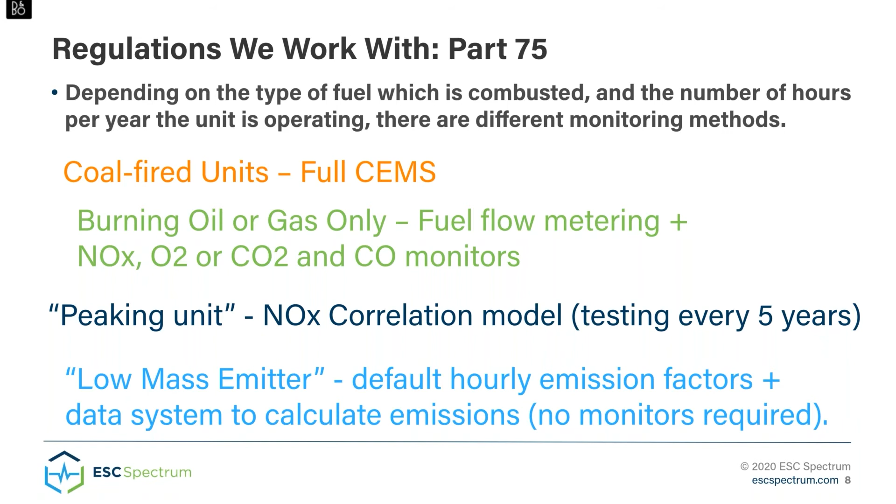So now you can see by these four examples that the amount of monitoring that's required, the amount of investment that's required, the amount of work that's required varies with the type of fuel that you burn and the number of operating hours that unit operates during each calendar quarter.

Moving on, how are these three regulations similar? Well, all three of them are similar because they all have a foundation in what we call 1-hour averages. For each minute that the unit is in service, the monitoring system measures the emissions that are desired and develops a minute average. Those minute averages are used to create a 15-minute average, and each of the 15-minute averages recorded in an hour are used to come up with an hourly average.

The same methodology for developing these hour averages is used both by Part 60, 63, and 75. Each of these regulations requires that these CEM systems be certified, and there are procedures outlined in each of the regulations on how to certify them.

Each regulation also requires that there are daily quality assurance checks. These checks are typically done each day to make sure that the accuracy and reliability of the monitors is being utilized, and that they are operating repeatedly and accurately each and every day. Each regulation also requires that some sort of quarterly or periodic reports be submitted to the agencies.

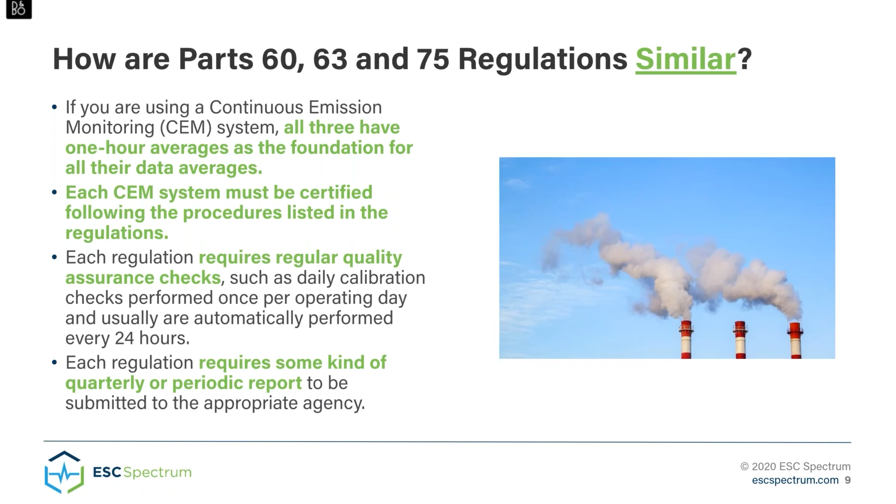Moving on, there's also annual requirements, meaning that every 12 months or so, you have to perform what's called a relative accuracy test audit. A relative accuracy test audit is a comparison between the emissions recorded by your monitoring system versus another monitoring system brought in by a stack testing company.

Stack testing companies are brought in from the outside. They use special reference method equipment that is approved by the US EPA, and you do a side-by-side comparison of the performance and measurement levels of your system versus the stack testing system.

This relative accuracy test is a series of comparisons and lasts between 3 and 8 hours in duration, and hopefully it proves that the accuracy of your system is very close to the stack testing or reference system.

In addition, we also have other events that we're concerned about. Like, for example, if excess emissions are recorded, meaning your hourly values or multiple values are recorded above the emission standards or emission limits outlined by the regulation or your permit - that's not good.

Excess emission periods mean that you are emitting more pollution than you should be, and something's wrong. Another occurrence is called downtime. Downtime occurs when the unit is in service and operating and making emissions, but your monitoring system is not working correctly and recording what the emissions are. The regulations basically say every minute that the system is in service and creating emissions, you must be monitoring those emissions accurately. When you're not, that period of time is called downtime.

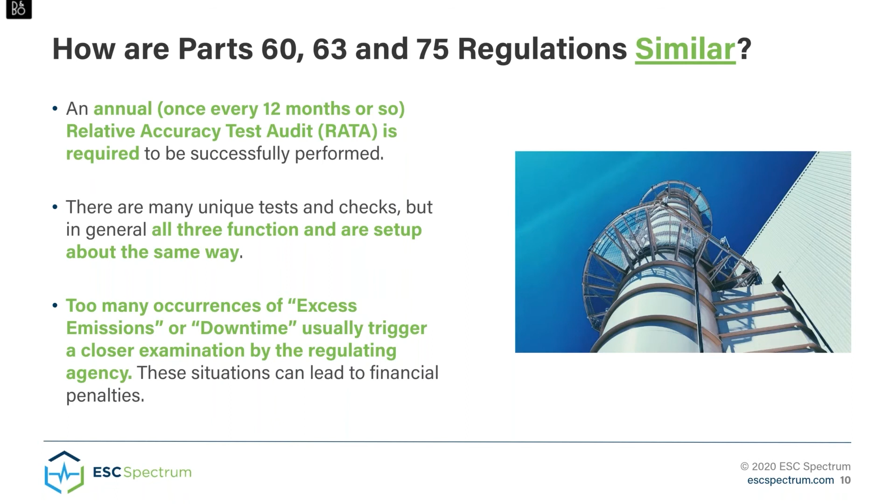All three regulations have emission limits or standards that they impose, and they can also have mass limits, meaning pounds per hour, tons per day, or other mass standards. The duration of these standards can be short or long. For example, some limits are as short as 6 minutes, while some averages are as long as a whole year. It depends upon the nature of the pollutant and the type of device you're monitoring that determines the duration of these standards.

If data shows that the emissions are over the limit, it's called an exceedance, and your facility can actually be fined or forced to be shut down if you consistently have these exceedances.

The regulations also define how compliance is determined. Compliance means you are demonstrating that your facility is operating in a way that does not exceed the standards. Continuous emission monitoring systems are typically used to demonstrate that you are in compliance with these emission standards. These emission standards are also defined in the operating permits.

Each facility in the last 25 years has been required by federal law to obtain an operating permit. The operating permit is the legal right for that facility to operate. Without an operating permit, the facility is not allowed to operate. You'd be surprised to know the number of types of facilities that are required to have operating permits.

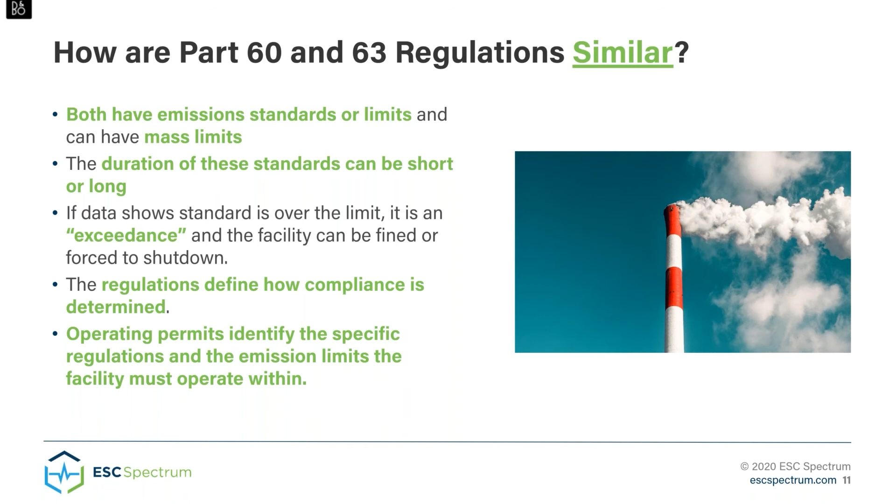The regulations and permits require that you demonstrate compliance with the emission requirements of your permits. There are three different types of compliance we'll talk about briefly. First is continuous compliance, where data is recorded continuously, taken from monitors and sent to a data acquisition system where it is continuously recorded.

The second type of compliance is periodic compliance, where data is recorded or written down on a periodic basis. You might be required on your permit to do a walk around of your facility to make sure everything is working correctly, perhaps once a week. This once-a-week check is an example of periodic compliance.

There is also indirect compliance, used because sometimes there is no direct way to measure a particular pollutant of concern. If that pollutant is being controlled by a pollution control device, then the operating conditions of that device or process are typically monitored to demonstrate it is operating properly. You might be forced to record the temperature, pressure, pH, or water injection rate of a pollution control device to demonstrate indirectly that you are in compliance.

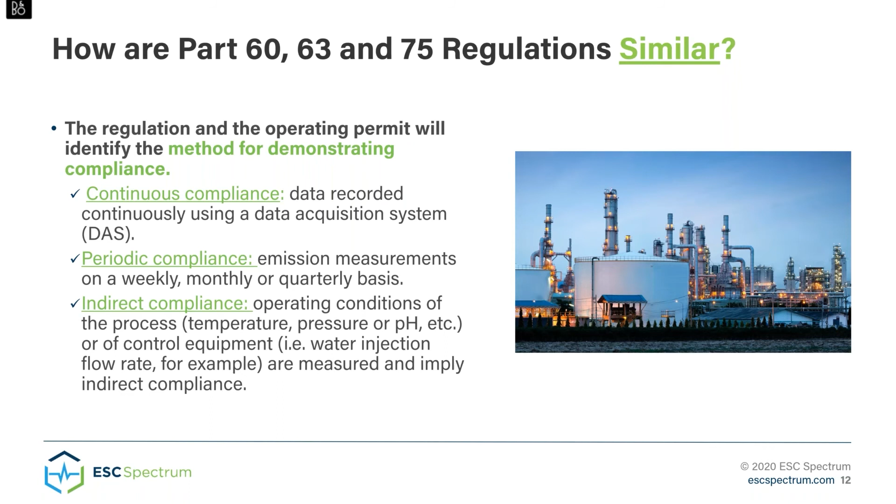How are these three regulations different? One way is that Part 75 addresses data downtime or data holes differently. Remember, downtime occurs when the monitoring system is not recording accurate data as it should be during all periods of time that the emission source is in service.

Part 75 handles these data gaps differently in that it goes back into your historical emissions database, and under similar operating conditions occurring now, it uses historical data to estimate and fill in that gap with what it believes is representative data. The algorithm that calculates this replacement value is tested and approved by the EPA. It's done on an hour-by-hour basis using an approved EPA algorithm and historical data. In that way, Part 75 differs from Part 60 and Part 63.

Those two systems report the downtime, where Part 75 fills it in with historical data.

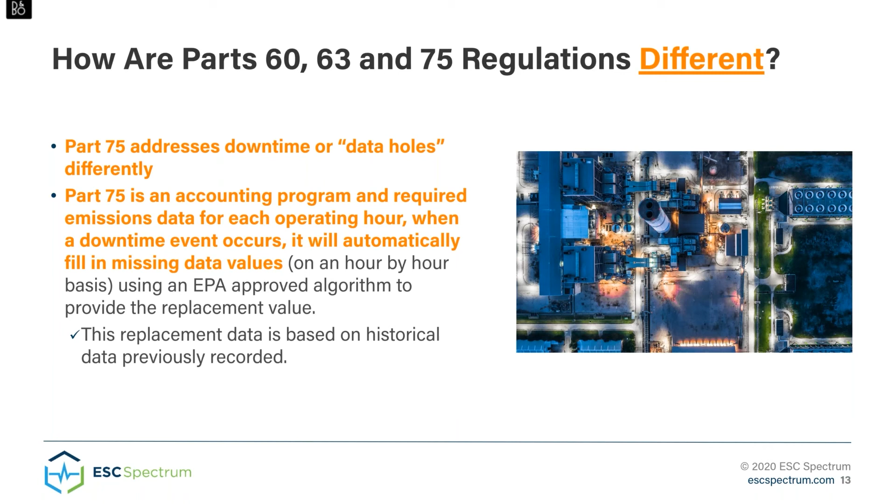Let's talk about operating permits again. I mentioned them a little bit earlier. Operating permits really came into effect starting in the late 1990s, initiated by the Clean Air Act amendments of 1990. The purpose of the operating permit is to have one document covering all the air regulations on that facility. It contains everything an operator needs to know about the requirements for operating that facility, what they can do, what they can't do, and what response the air quality agencies expect from them. So it's a single document that incorporates all the air quality regulations and information into one place.

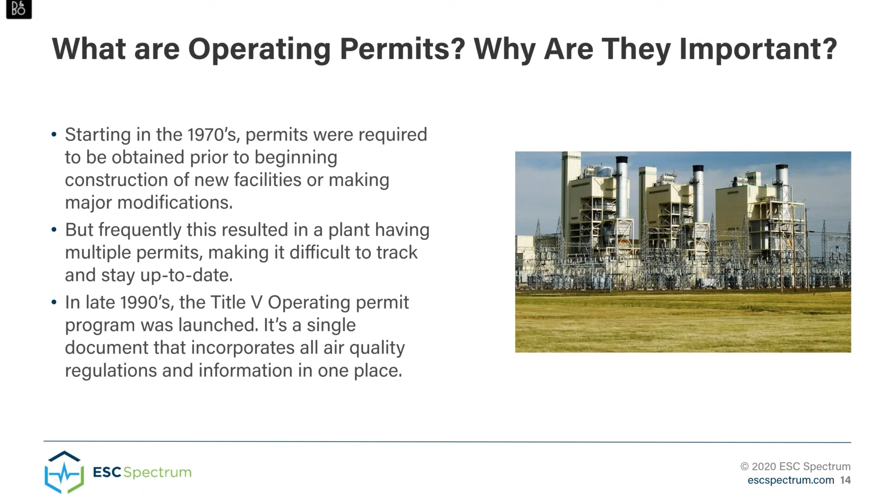Let's move on to our second topic, which is boilers and combustion turbines. This is where you burn a fuel and the fuel releases heat. That heat is typically used to create steam, which is used in a process to operate equipment, whether to run some pumps or spin a turbine generator to make electricity. Boilers and combustion turbines take the fuel, burn it, release the energy, and create a product.

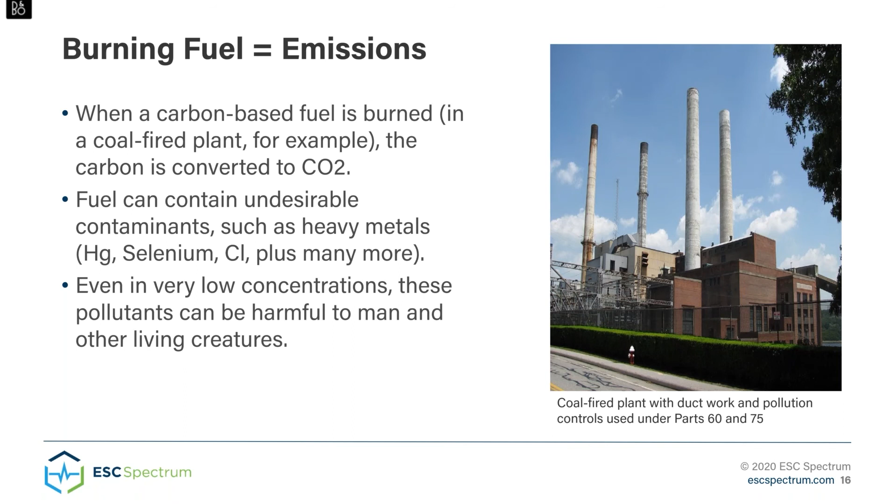Let's talk a little bit about the pollution control equipment. Lots of plants add pollution control equipment to reduce or capture their emissions, trying to bring emissions below the limits found in their permits. There are four main pollutants that the Part 60 regulations focus on. The first is particulate, or as you typically think of it, smoke. Those particulates inhibit the ability to see through the flue gas stream, so we call that smoke. There are specific pollution control devices built and used to capture those particulates.

First are cyclone separators. Second are baghouses, which are no different than the vacuum cleaners you use in your home to vacuum the dust and particulates from your carpets. The baghouses that power plants use are much, much bigger, with tens of thousands of bags in them to capture that particulate.

Two other devices used to capture particulates are the electrostatic precipitator, which uses a static charge to attract and capture particulates, and the wet scrubber. We'll show you a picture coming up where you'll see what looks like a white plume coming out of a stack. You might think that's white smoke, but it really isn't -- it's the water vapor that the wet scrubber uses to capture the particulates.

The other two pollutants that Part 60 is concerned about are NOx and CO, carbon monoxide. Here we have chemical reactors that convert the NOx to oxygen and nitrogen gas, and further oxidize the carbon monoxide into carbon dioxide. These two types of reactors are catalytic reactors and selective catalytic reactors, which are very specific to the type of pollutant you're working against.

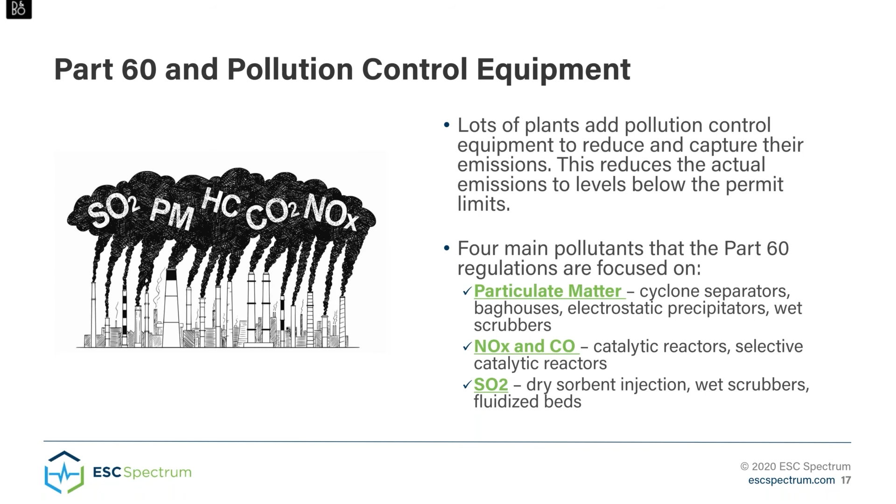Then you can also have what are called fluidized beds. Again, it's a chemical reaction system to capture the SO2. So these are the four main pollutants that Part 60 regulations are focused on.

Moving on, let's talk about the sources of those emissions. Let's talk about boilers and combustion turbines and how they work. Boilers are used to burn a fuel, like I said before - that can be coal, gas, oil, wood, tires, lots of different sources of fuel. It releases its thermal energy, heat, to boil water and make steam. This is a graphic representing a boiler where water is heated and converted into steam. The steam is directed to a turbine, causing it to spin. That turbine is connected to a generator, and that spinning generator and turbine set allows electricity to be produced.

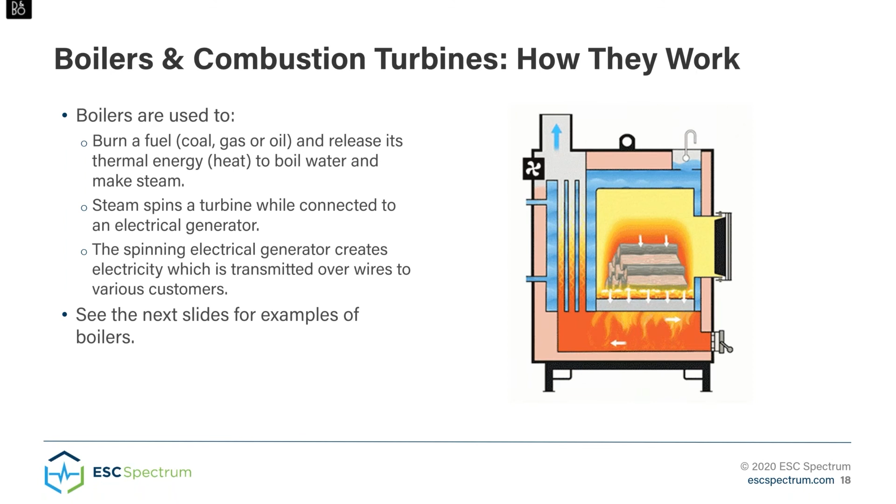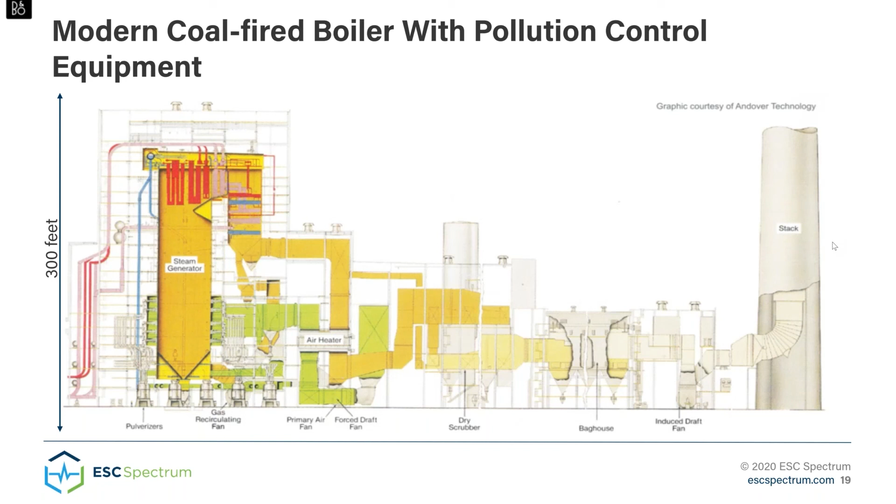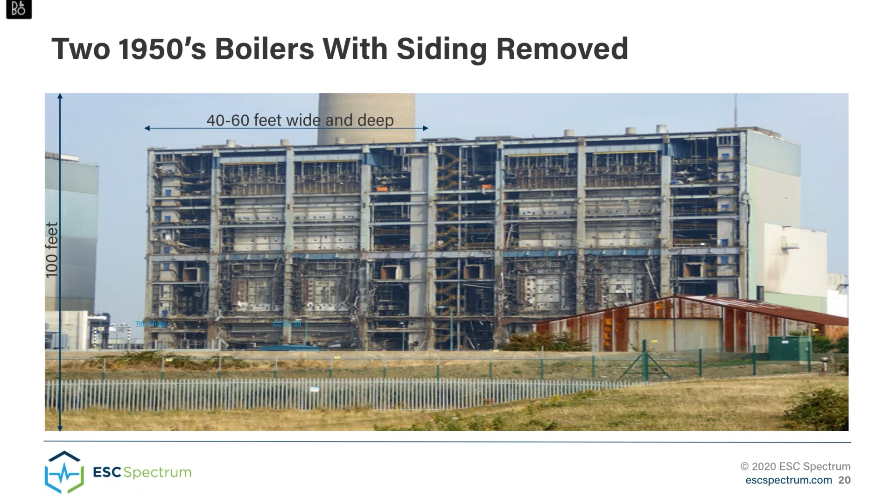Here's a picture of the side of a cutout of a boiler, and these actually are two boilers. These boilers were probably built in about the 1950s. They're about 40 to 60 feet wide and deep, and approximately 80 to 100 feet high. So these are two examples of mid-sized type boilers that were built probably in the 1950s.

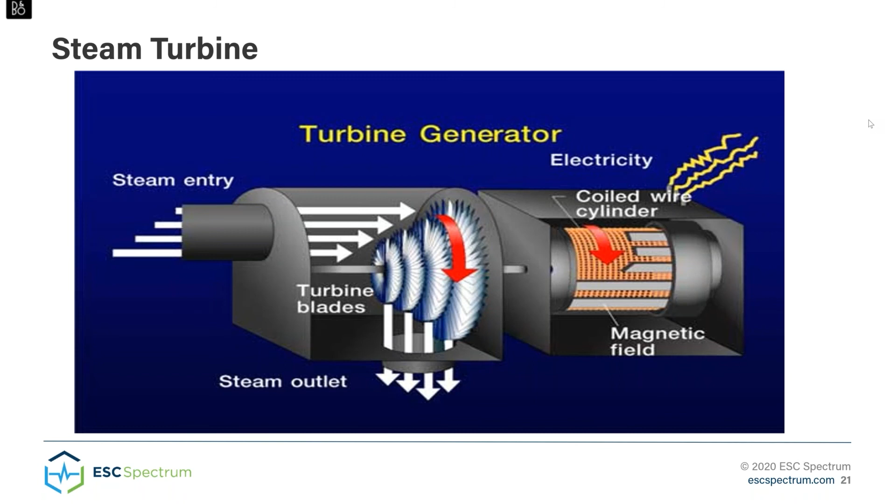Here's a simple diagram of a steam turbine. You can see that the steam is made, comes in on the left side and passes over the blades of the turbine, trying to spin the turbine, and then the steam goes out the outlet. As that turbine spins, it's on a shaft connected to the electric generator, and as that generator spins, it creates electricity. So this is how you take steam and make electricity - a very simple diagram of a turbine generator set.

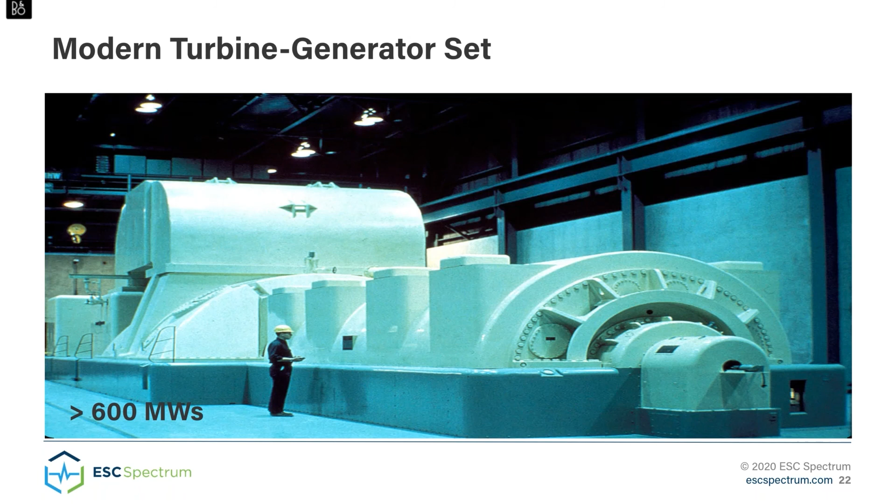Moving on, let's talk about a combustion turbine, or CT. A simple combustion turbine really is a jet engine from a plane mounted in a frame, and the exhaust gases are blown across the turbine generator set to spin it and make electricity. Gas or oil is burned as the fuel, and the exhaust causes the turbine to spin. After the exhaust gas passes through the turbine, the hot gases are vented into the atmosphere, where unfortunately a lot of the thermal energy is wasted. Nowadays we do it differently, and I'll explain that in a minute.

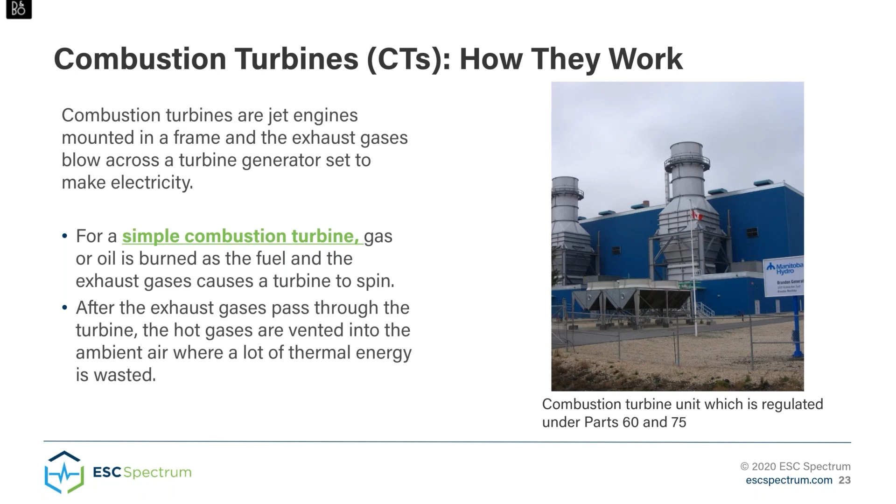To spin that turbine and out the exhaust stack. At the same time, that turbine is connected by a shaft to a compressor. So as the turbine spins, the compressor spins and draws in outside air and compresses it, so there's even more air and a hotter combustion chamber results. As those hot exhaust gases spin the turbine, that turbine is connected by a shaft to a generator, where electricity is made.

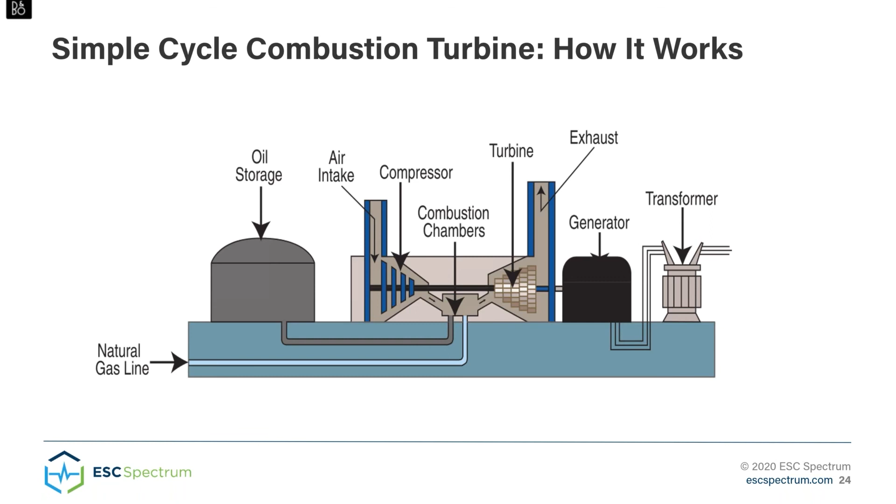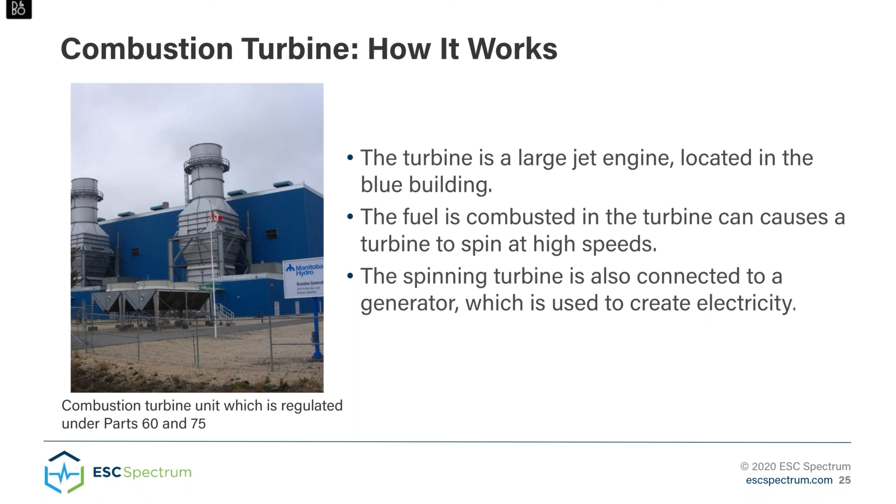This is a picture of a simple turbine generator. The actual jet engine is located inside the blue building. Again, the combusted fuel spins the turbine at very high speed, and it's connected to a generator where electricity is created.

It's not uncommon to see multiple combustion turbines located on a single site. A 4-pack like this is very common. The most I've ever seen at a single site is 64 combustion turbines at one site.

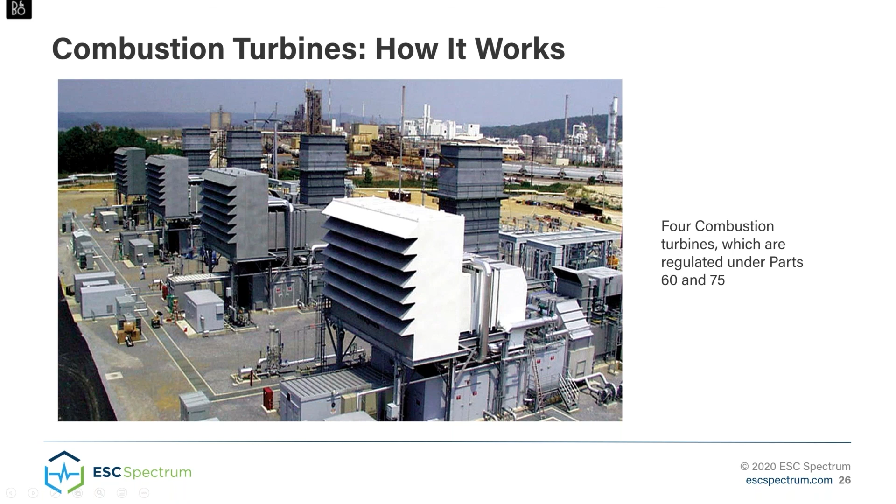Combined cycle combustion turbines are a little bit more complex than a simple cycle. As I said before, the hot gases pass through the first turbine generator set and are still quite hot, probably 800 to 900 to 1,000 degrees. They contain a lot of energy that normally is lost when vented off. But now it's routed through a heat exchanger, where water is heated up to make steam, and that steam is routed toward a second turbine generator set, which makes additional electricity.

By the time the exhaust gases leave the heat exchanger, temperatures are down around 150 degrees, from the 900 or 1,000 before. So they've extracted a lot more energy out of that flue gas and are making a second round of electricity. The remaining energy makes it much more efficient and cost effective than the simple cycle turbine.

You're going to ask, why would people have simple cycle turbines? Well, they can quickly come up to speed and begin generating on a moment's notice. I know of simple cycle combustion turbines that can be started and be at full operating capacity within 15 minutes.

Combined cycle combustion turbines like this one, because of the heat exchanger and other ways it operates, take much longer. It may take 8 or 10 hours to be started and reach full capacity. So it's not uncommon for a generating company to have both simple cycle, quick reacting combustion turbines, and more efficient but slower reacting combined cycle turbines available.

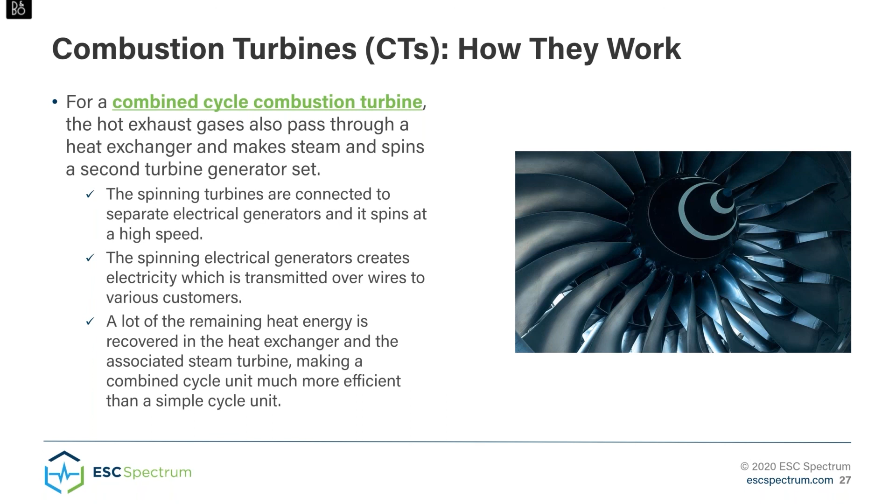Let's move on to the third and final topic, the petrochemical industry. There we have some unique things that we need to talk about. Let's talk about flares and fence line monitoring.

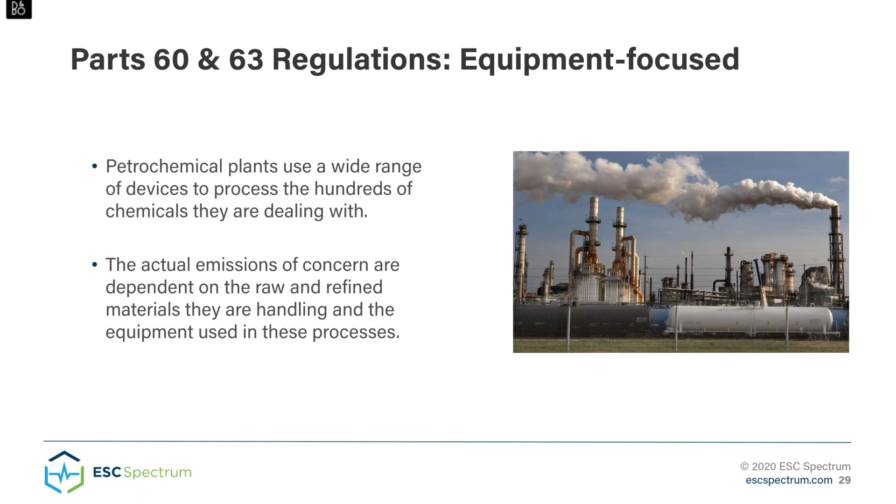Petrochemical plants use a wide range of devices to process the hundreds of different chemicals they're dealing with. The actual emissions of concern depend on the raw and refined materials they are handling and processing in these pieces of equipment. So there's a wide variety of emissions that a petrochemical facility has to worry about, as opposed to a boiler or a combustion turbine.

Part 60 and 63, in retrospect, Part 60 regulations are simple and much more straightforward compared to Part 63. Part 60 facilities are typically focused on making power, whether steam or electricity, and at a given facility there may be between 1 to 50 sources located on that property.

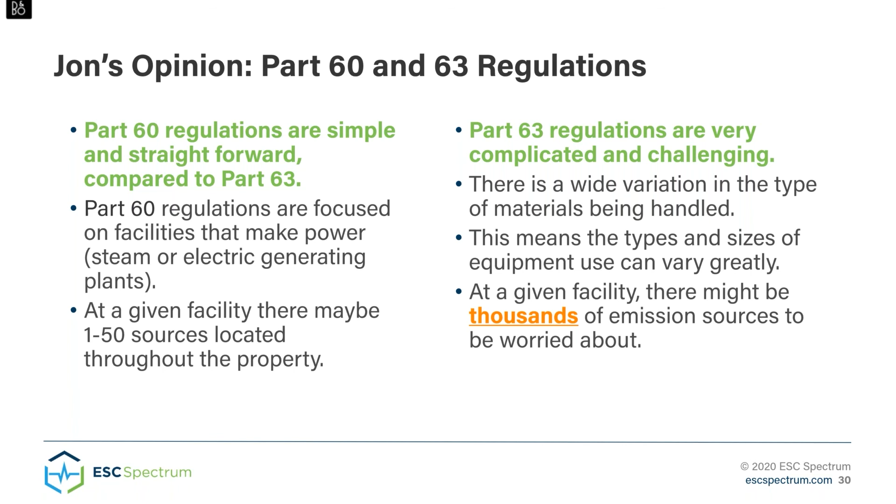Part 63 regulations, as said before, are much more complicated and challenging. That's because there's a much wider variation in the type of materials being handled, burned, processed, and treated. This means the types and sizes of equipment can vary greatly, and for a given petrochemical facility there may be thousands of different emission sources that an operator has to worry about. So there are really night and day contrasts between Part 60 facilities and Part 63 facilities.

For petrochemical facilities, there are unfortunately some undesirable emissions that they have to deal with. Frequently, petrochemical facilities use flares to destroy hazardous chemicals present in case there's an upset in the operating condition, and they need to vent those emissions off. To make sure they're not hazardous, they run them through a flare, and the flares are used to destroy those hydrocarbons. So the duration and temperature of these flares is continuously monitored to make sure they are working when needed, and that they are working properly.

Monitoring the temperature of the combustion zone of the flare is an example of indirect compliance. You don't know that the hazardous pollutants have actually been destroyed, but it is presumed through testing that if the flare reaches a certain temperature and is maintained at that temperature, that combustion process will destroy those hazardous pollutants and not allow them to be released into the environment.

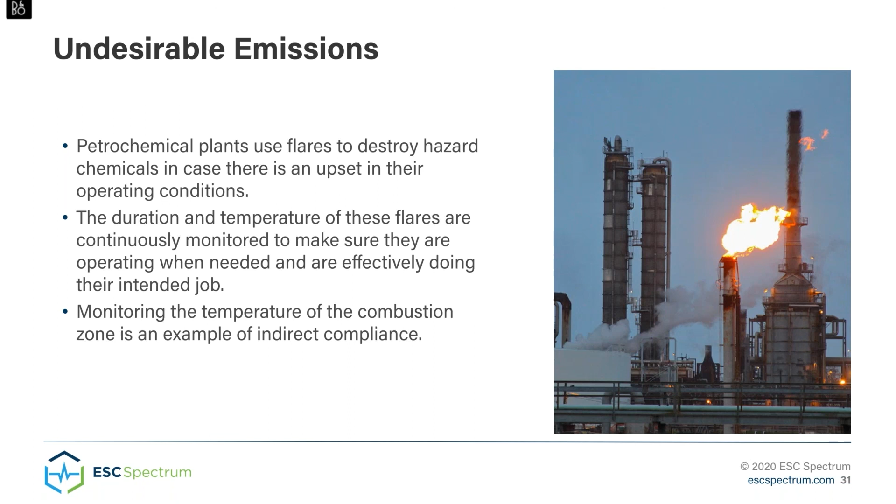Let's talk about one new round of monitoring that has come to the petrochemical industry in the last 5 years. Starting in 2017, sites were required to set up monitoring systems along the perimeter of their plants to monitor the ambient emissions in the air.

What we're talking about here is measuring the amount of benzene, as a typical hydrocarbon, that is being allowed to escape from your facility. This network of monitoring sites is along the perimeter of your facility, and the number of sites is determined by the length of the facility. Remember, some of these facilities are quite large, covering square miles, so you might have a monitoring piece of equipment every 500 feet or so, and several hundred of these monitors located throughout your facility.

They actually suck in the ambient air and measure the amount of air sucked in, sampling for maybe 10 days to 2 weeks. After that period, the sampling canister is swapped out for a new one, and you continue to continuously sample the ambient air. That canister, having captured whatever pollutants were there, is analyzed, and from that analysis they can determine an average concentration during that entire sampling period.

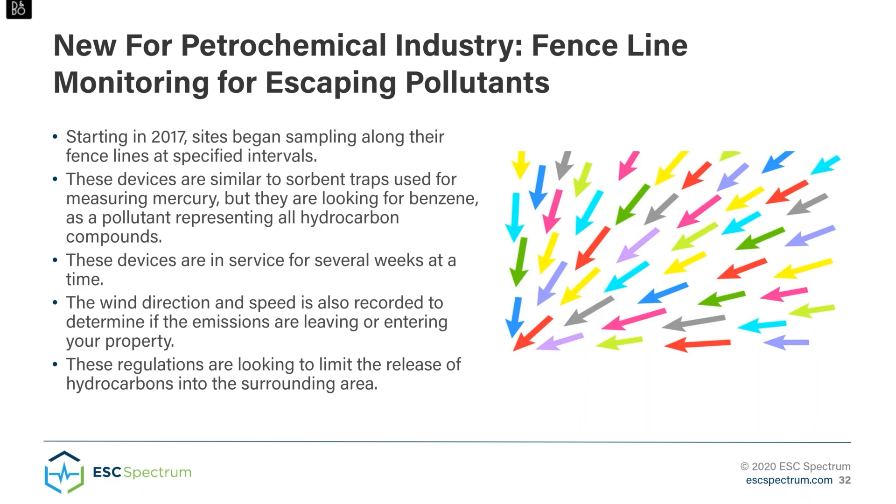So now we're coming to the end. I just want to wrap up here and leave you with a couple of takeaways. As we said, for these three major types of air quality regulations, there are similarities between all three, and there are differences, and sometimes those differences can be especially challenging.

Combustion turbines and boilers create hazardous emissions along with the electricity they produce. It's important for the health and safety of the people surrounding our facilities that we stay in compliance with the emission standards and limits found in the regulations and the air permits.

The petrochemical industry faces compliance regulations that are both similar to and different from the power generation industry, and because of that, it's a little bit more challenging.